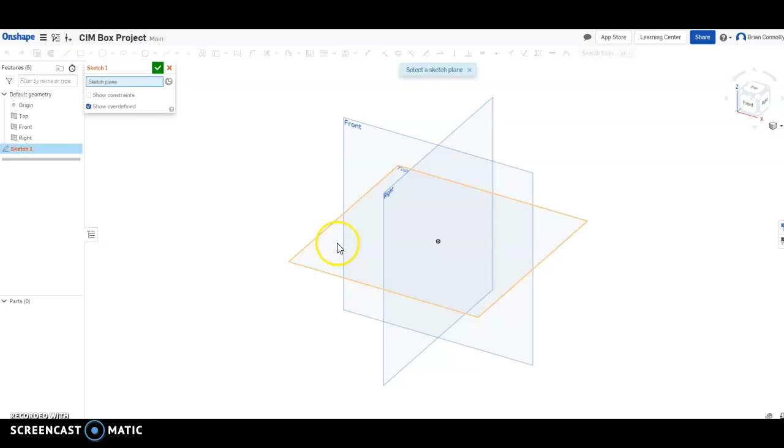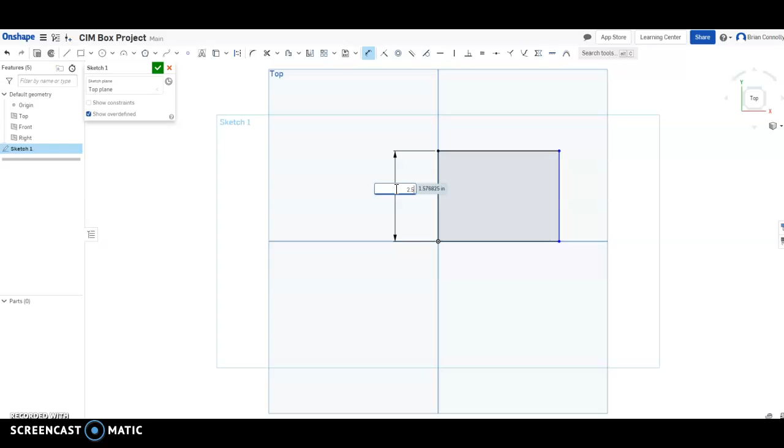And so the first thing I'm going to do is create my stock. If this is your first time using OnShape, or if you want to use something that is not OnShape, feel free to use some tutorials. I'm going to go through this fairly quickly. And all of the basics here are exactly the same as what we've used before in class.

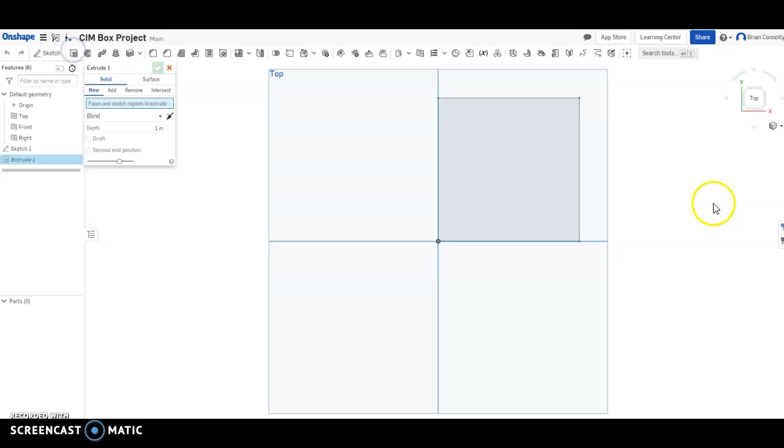So the first thing I'm going to do is define the stock, and I'm going to define the size, the width, and the length. Right there, 2.5 by 2.5. And then I will extrude it to my full depth, and so that's going to be 3 inches. And so all I've done here is create a stock that is the exact same size that we will end up using as our material.

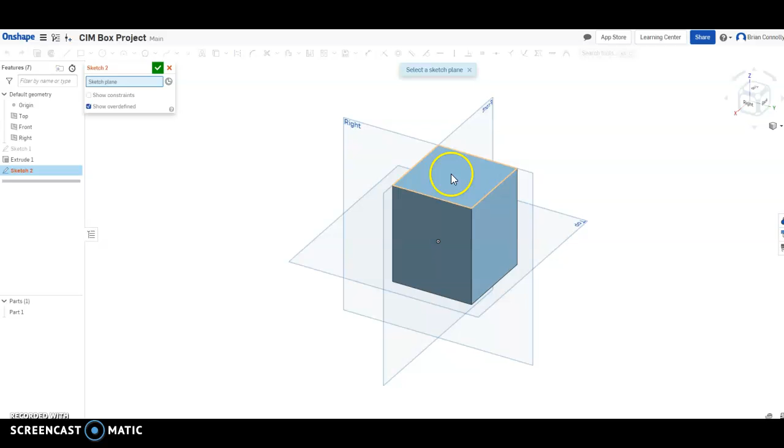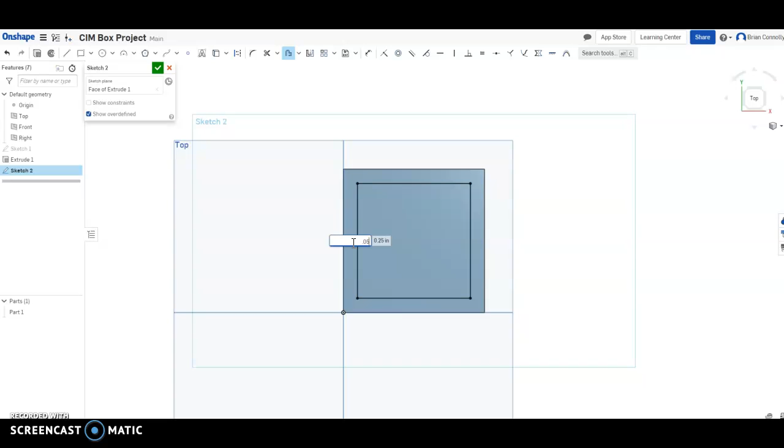The next thing I'm going to do is create a sketch, and I'm going to do so on this top plane right here. And what I'm going to do is look at this and create an offset. It gives me a direction, it's going in. I can click right there to make it correct. And I want to have 0.05 inches around this whole thing. So we want to have it so that the mill cuts out a little bit of material around our entire part.

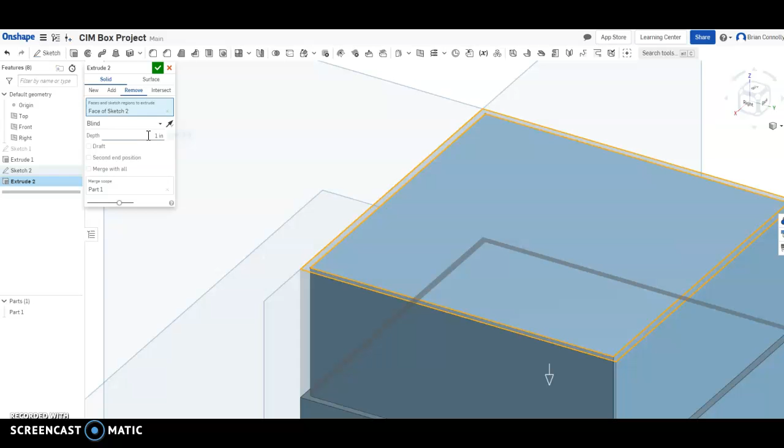And so I'm going to finish that sketch, and I'll look at it again at an angle, and I'm going to extrude just this tiny little bit right here, and I'm going to remove that material for my full depth. And I like to start with knowing what my lid is going to be, because that kind of informs what the base is also going to be. It doesn't matter which one you do as long as you plan ahead.

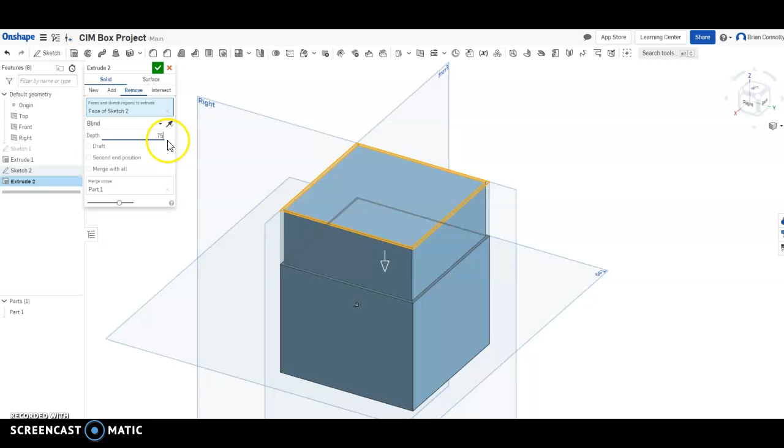So I'm going to make a lid that's a little on the tall side. It can be anywhere between 1/2 inch and a full inch. I'm going to make mine somewhere between 1/2 and 3/4 inch for the total height of the lid. And so I'm going to click on that, and there we go. The other thing I'm going to do is measure. I'm going to figure out how much space I have left. And so I have 2¼ inches left. I need at least 1/2 inch for a clamping boss.

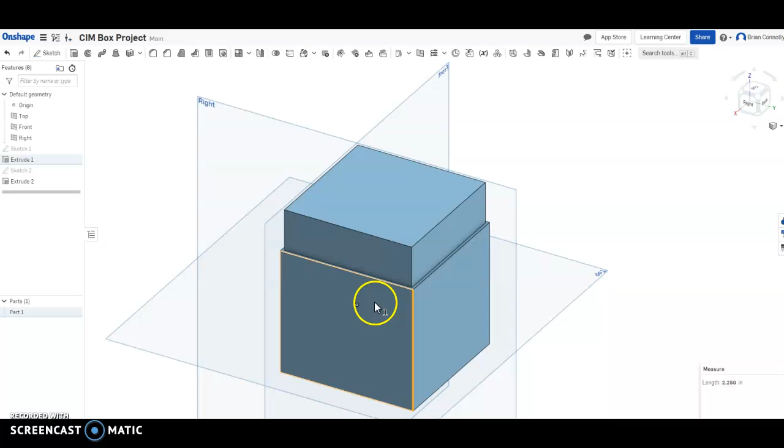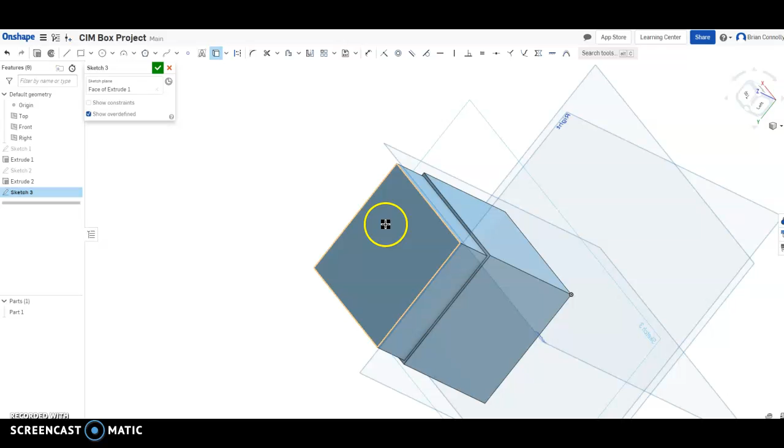So I'm going to create a sketch on this bottom right here, and I'm going to not create an offset, even though I could. What I'm actually going to do is spin this around, and use this tool called Use. In Inventor they call it Project Geometry, but it's pretty much the same thing. We're going to take these edges that exist on this part, and we're going to put them directly onto another sketch.

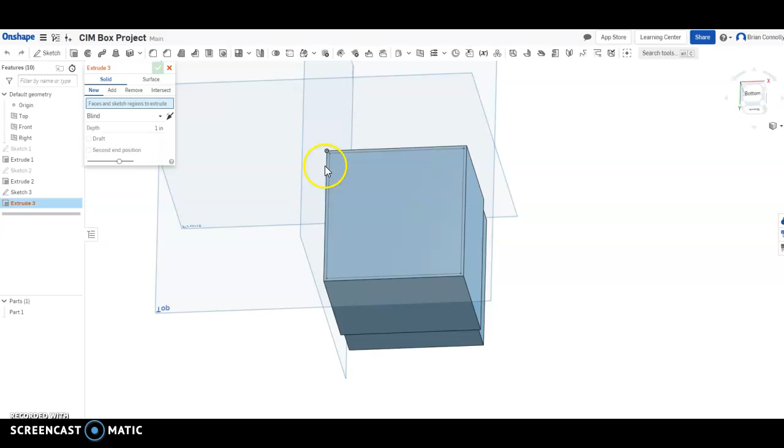So we've got that on there. I don't have to add any dimensions. You'll notice that it's fully constrained because it's based completely off of that other sketch. And so there we go. I'm going to then extrude just this little bit. I'm going to remove, and I figured out that I had 1.75 of material for this bottom. And so I'm going to remove it there.

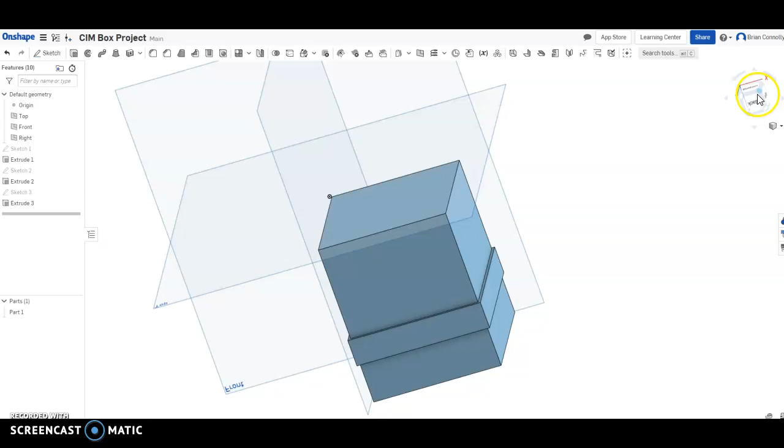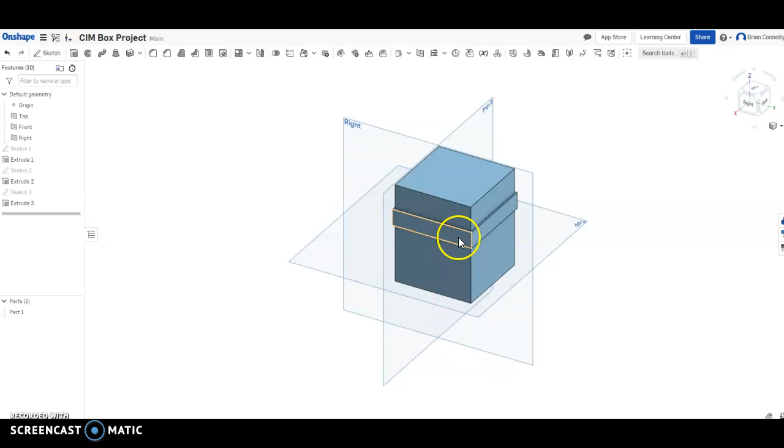And as you can see, this is our base that we can work off of: we have a lid that's 0.75 tall, then we have a base that's 1.75 tall, and then we have a clamping boss that's 1/2 inch. The important part is that this clamping boss is 1/2 inch. It can be bigger, but it can't be any smaller.

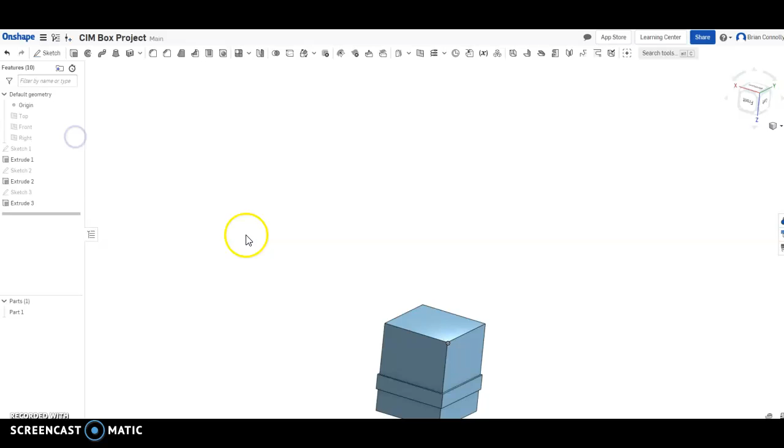And then, so my lid could be slightly smaller if I wanted to have a slightly bigger base as well, but I suggest not going anywhere below 1/2 inch for your lid. The next thing I'm going to do is I'm going to make a sketch on this lid part right here, and I'm actually going to hide some of my extra planes. Don't need those right now. And I'm going to take a look at this.

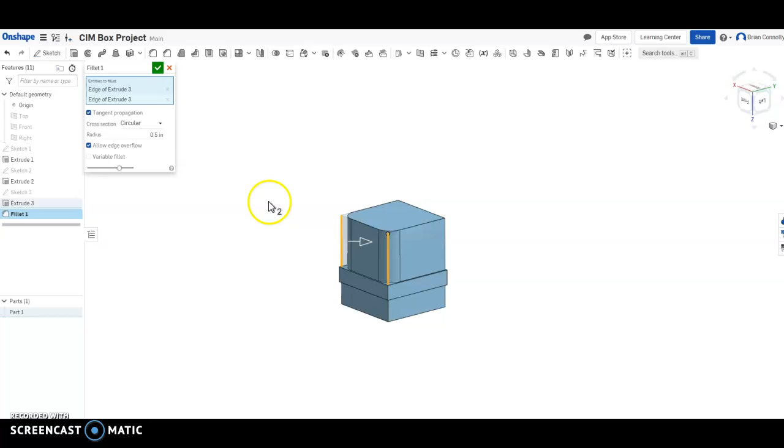And right now what I want to do is I just want to add in and kind of make this a little more unique. And so things I can do is I can add some fillets. And so if I wanted to, I could make a fillet maybe 0.5. Don't make it too small. Or if I really wanted to, I could actually do some chamfers as well.

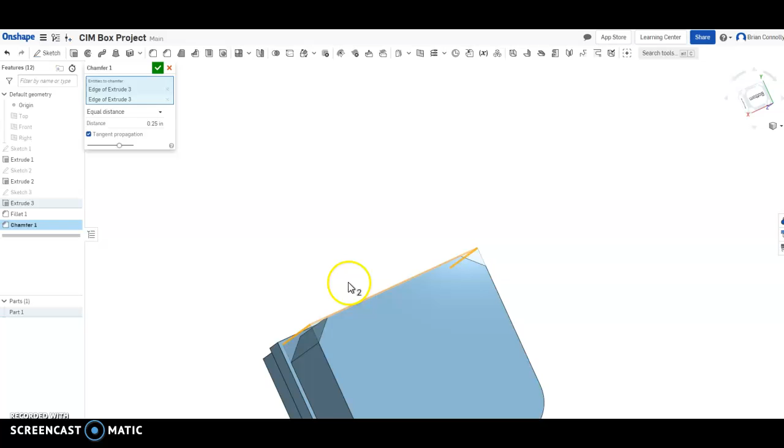And any exterior corner, like here, and if I'm looking around, I can also look at this one as well. It's okay to have exterior corners that have sharp edges. Those are all good. The mill can actually do that. But inside corners, we're not going to be able to actually do that. So I'm going to create that and hit OK.

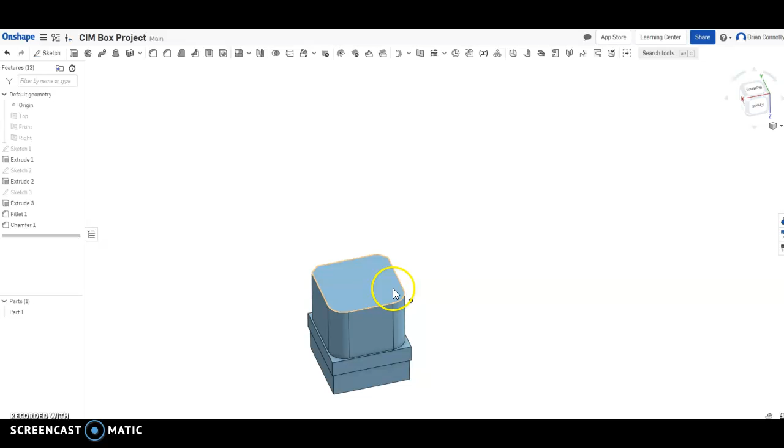And you'll notice I'm working on the bottom first. It just tends to work a little bit better because we can get the inside walls and everything. And then once I've got an inside curve that I know is good and correct, the lid is a little bit easier. And so I've got that.

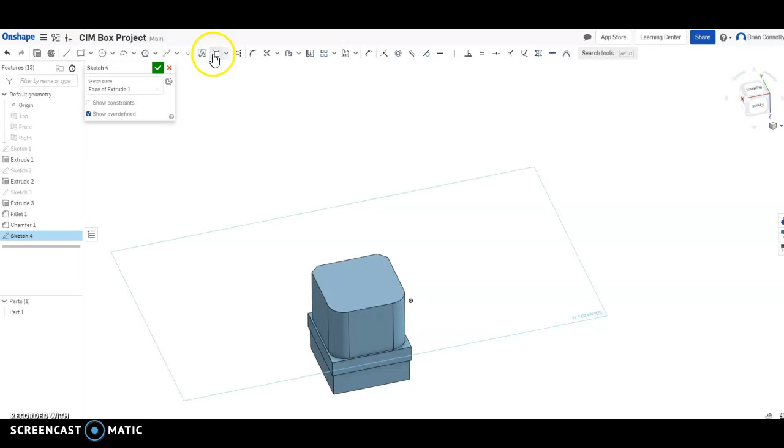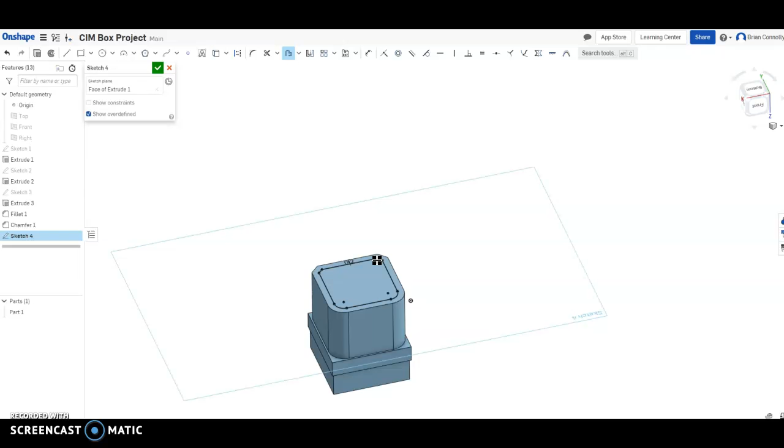I'm going to make a new sketch right here, and the simplest box you can really make is, make the outside this unique shape, whatever you want it to be, and then again just offsetting. And so I'm going to offset it in. I did that wrong, so I'm going to offset this, and I'm going to make that 0.2. So our walls need to be at least 0.2 in thickness. So that's going to define the thickness of my walls.

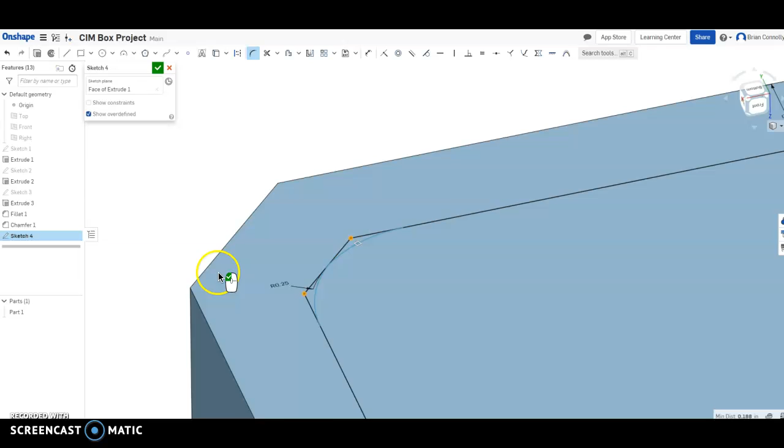And then I also need to have, and you can do this with a sketch or a feature, all of my inside corners need to have a fillet that is no smaller than 3/16 of an inch. And so I've created those fillets on these sides. These are already big enough, and so I don't need to do that, but I could for those sides as well. And then created my fillets and all of that.

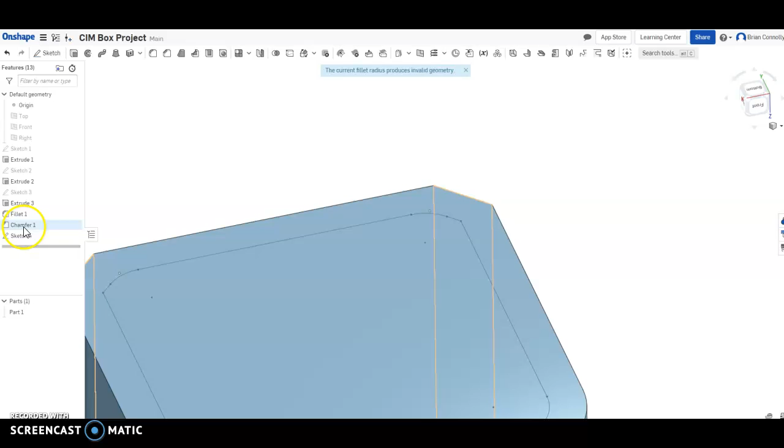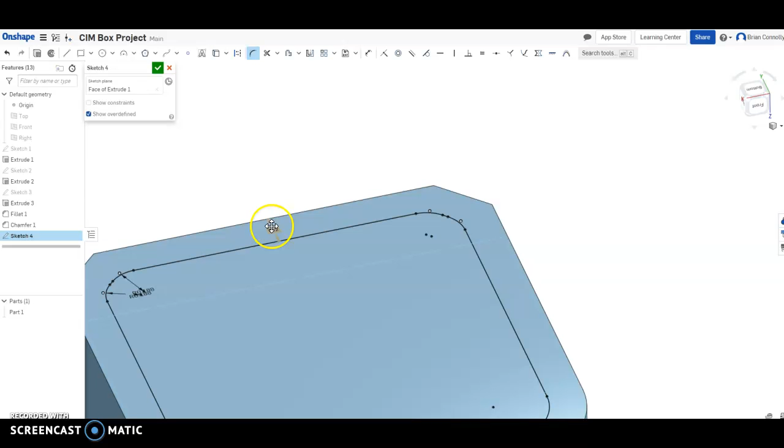And going back to that sketch, I can also click on this and go 3/16, and there we go. We're all good. I think I missed these fillets just with the size of everything. And so 3/16. And so now we can see that all of our arcs are at least 3/16. We have a wall thickness of 0.2. And so I'm actually ready to extrude this.

And so I'm just going to extrude that cavity. So I'm going to remove. And a quick and easy way to do that is I'm not going to go blind. I'm going to go to face. And I'm going to click on this face right here that defines the bottom of this. But I'm going to do an offset distance, and that's going to be 0.3. We need at least 0.3 on the bottom and on the top. And that allows that floor thickness to be thick enough that it doesn't break when we're milling. And so we've got 0.3.

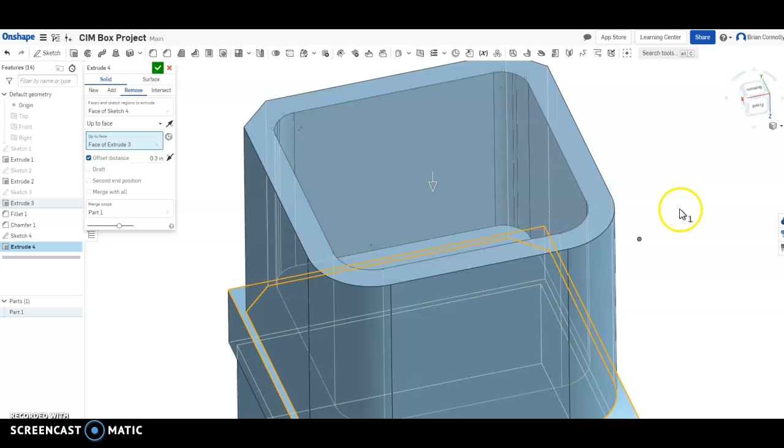If I want to, I can change my view, go shaded with hidden edges. I'm changing my view just a little bit, and I can see that, well, look at that, there's a little gap there, and that's the bottom of the inside. That cavity is offset enough with my clamping boss. So we're actually going to cut right at that transition right there. And so that part is good.

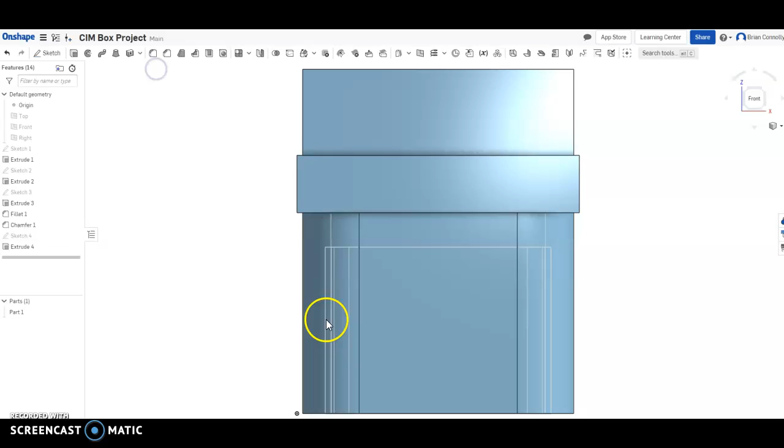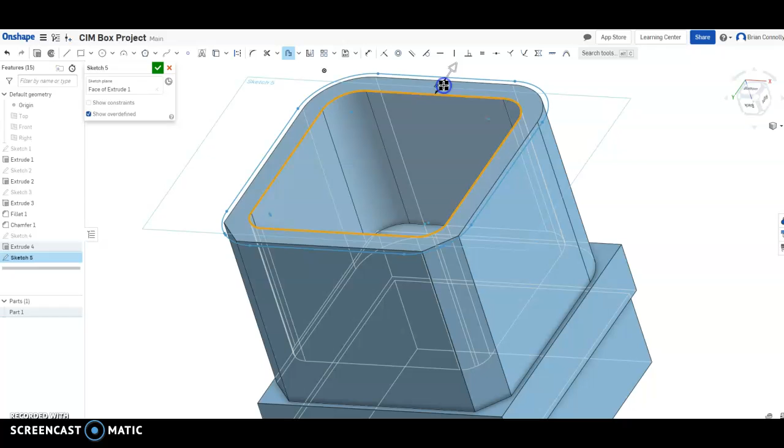The next thing that I'm going to do is I'm going to create another sketch here on the top. Oops, not extrude, but a sketch. Then I'm going to offset, and I want to offset all of these faces right here, and so I'm going to make sure I select all of these things right here and all the way around, and I'm going to offset it by 0.1. That's going to be my distance there, and that's the lip that I'm going to do. So I can click here, and 0.1 kind of splits the difference right there. That's all good.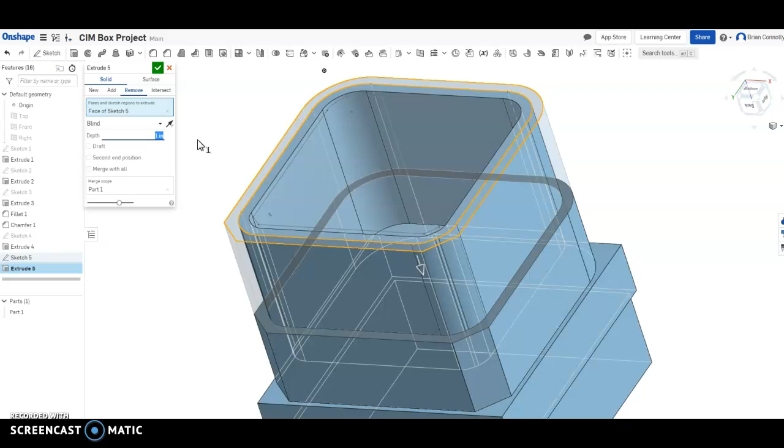I'm going to hit OK, and I have this little lip going on right here. And so I can extrude, and I'm just going to extrude this little bit right here. I'm going to cut it, I'm going to remove it, and it's going to cut out just 0.1. And so we kind of have a square cut out of 0.1 by 0.1 right here. And so we have this little lip going on.

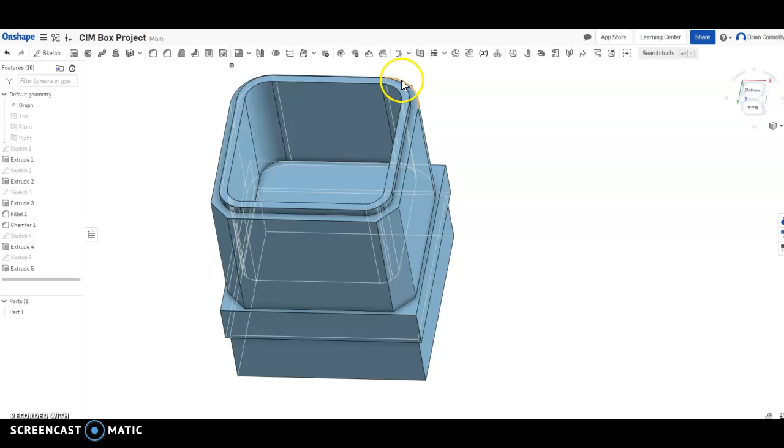Okay, and so that right there in the basics is all we need to do for the bottom of this box. What you're going to notice is that there is kind of a unique outside profile. You should have that as well. But then what we need is to have all these exterior corners that are going to mate with the top also be rounded, because our mill can only do inside corners that have a round to them.

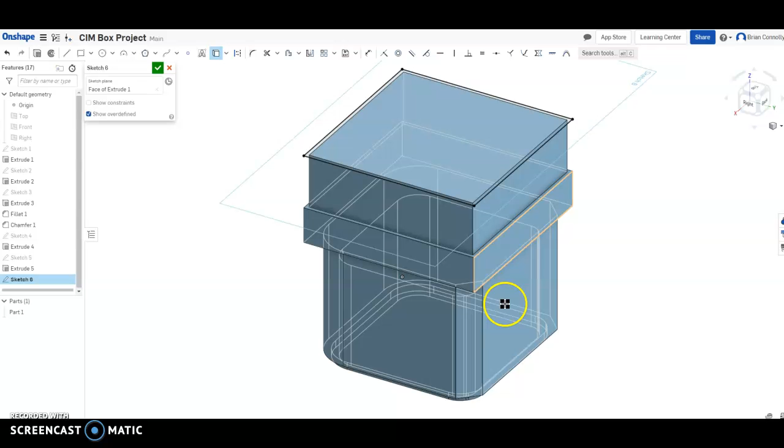I'll fillet it. The next step is to flip this around, and I'm going to create a sketch right here. And on this sketch, I'm going to first work from the outside in, so I'm going to use my Use tool again, and I'm going to click on this shape right here and see if I can't get... I guess I didn't get all of those sides, so I'm going to try this. Maybe I can select this face right here, and what I'm looking for is this outer profile so that the top and the bottom both match. Okay, there we go, I got that.

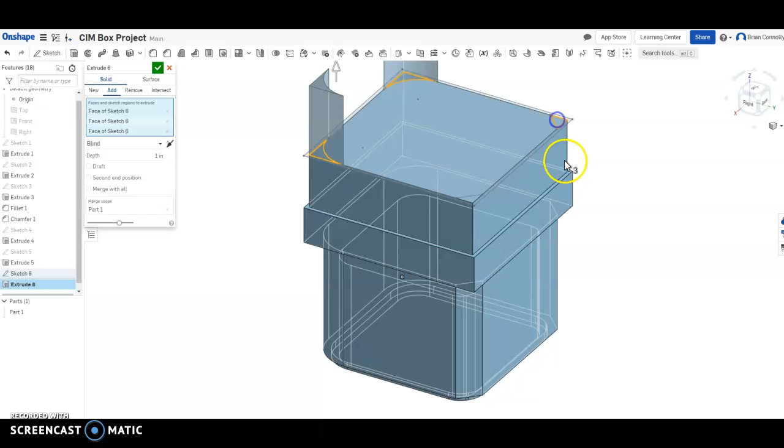From there I can extrude, and so I'm going to cut out this and this and this and this. In this case I'm going to remove, I'm going to go to face, and I'm going to select right here. So I want all of that stuff to cut out right there.

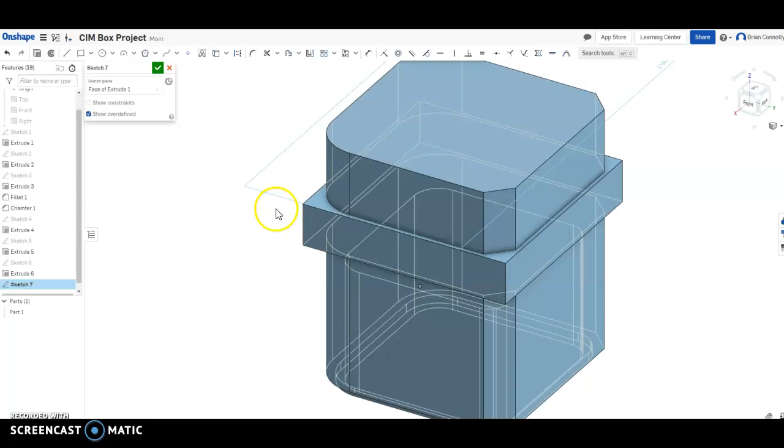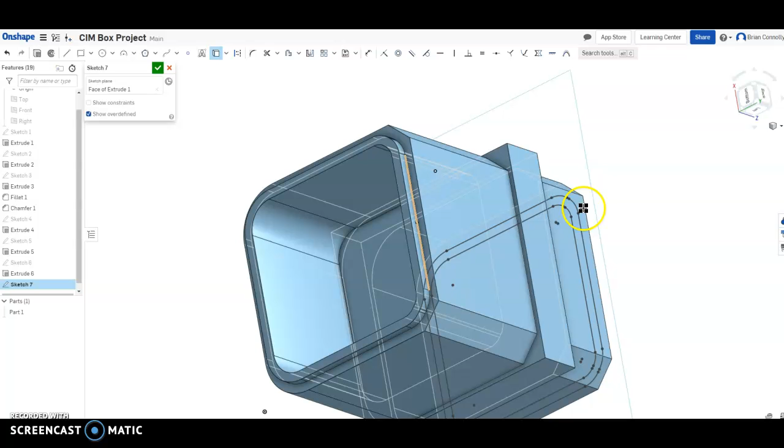Okay. The next thing I need to do is make another sketch right here on the top. And what I want to do is extrude and figure out the distance. So I'm going to use my Use again. And I need to figure out this shape right here. I need all of this kind of inside shape right here, where there's going to be an interaction between the top lid and here. So I've got that on my part, and then what I'm going to do is offset that. I need it to be just a little bit

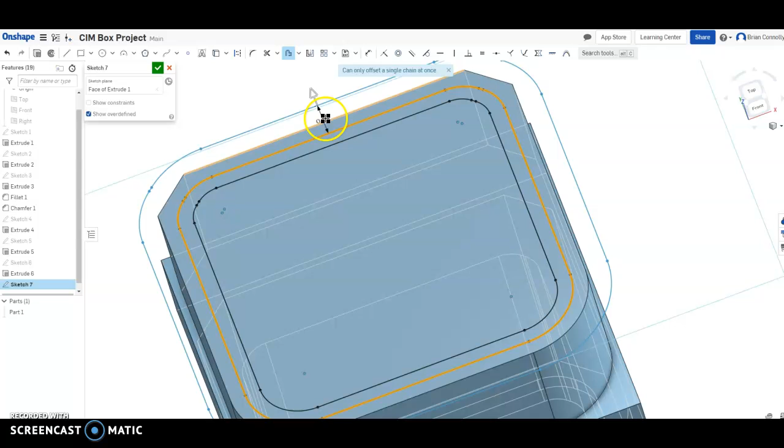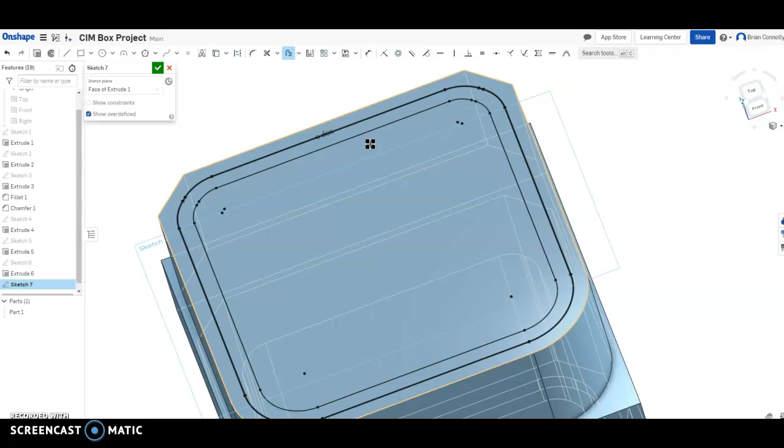bigger. So I'm going to click, and I can already tell you that right now it's kind of in the wrong direction, but that's okay. I will get it to be the right direction. So I'm going to click on this arrow, it flips out, and in this case I really only want it to be 0.005. And what that's going to allow me to do is have it be big enough that the two parts won't interact and won't collide, but small enough that there's still a tight fit. So you can see there's a little gap here.

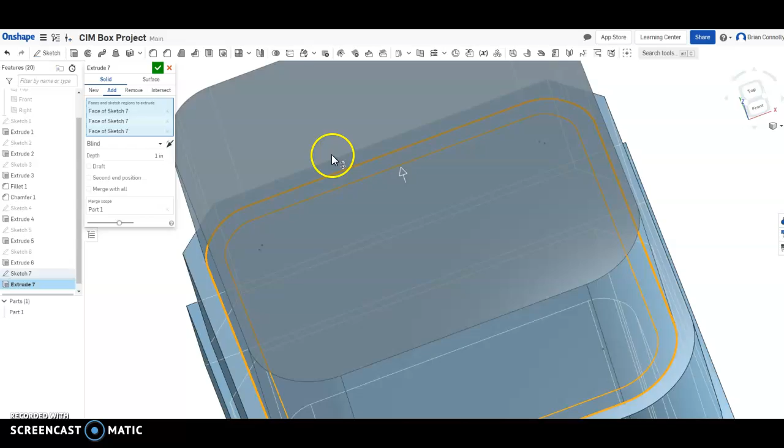So what I'm going to do now, I'm going to extrude, and it's going to be this face, and then don't forget to get that little thin ring around it as well. I'm going to remove, I'm going to go to a face, and that's going to be this bottom, but then I'm also going to put that offset distance right there.

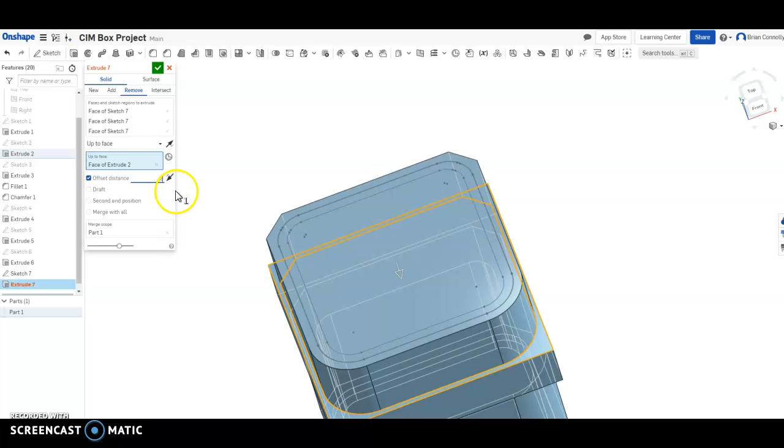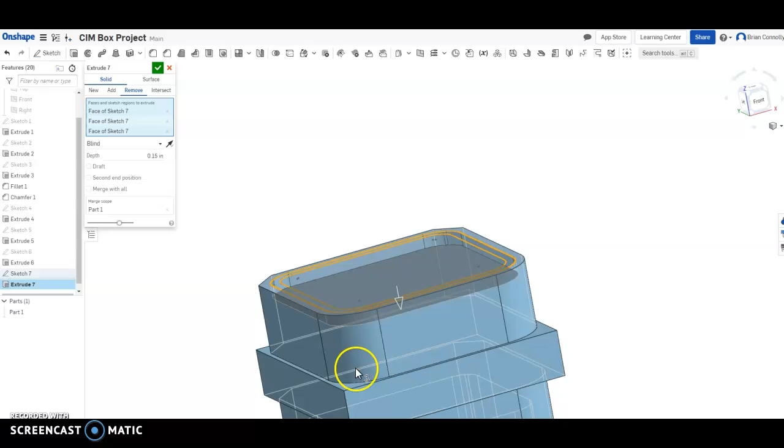The other option for you, if you want to have a little thicker of a lid, is you can make sure that when you extrude, instead of going to face, you can have a blind one, and just make sure it's more than 0.15, and that just allows our distance right here. The two parts won't interact with each other, the 0.1 lip and this 0.1 hole right here. So I'm going to hit OK.

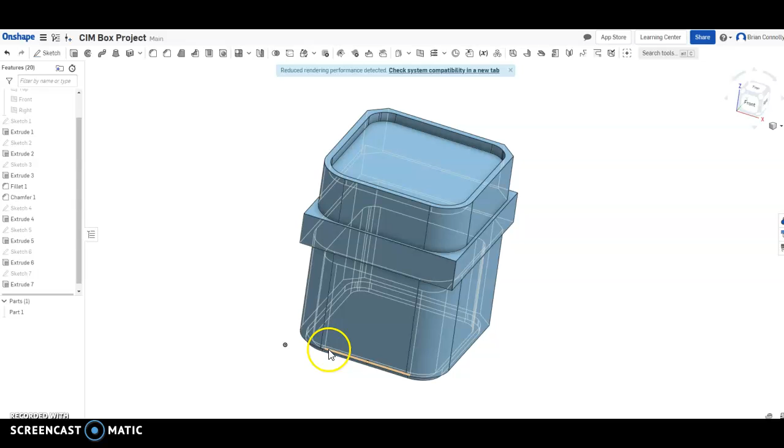And so here you can see that we have not only the same profile all the way around, we also have a little lip right here that's going to interact with our lid, and then that lid itself is just slightly bigger than the part it's going to mate with.